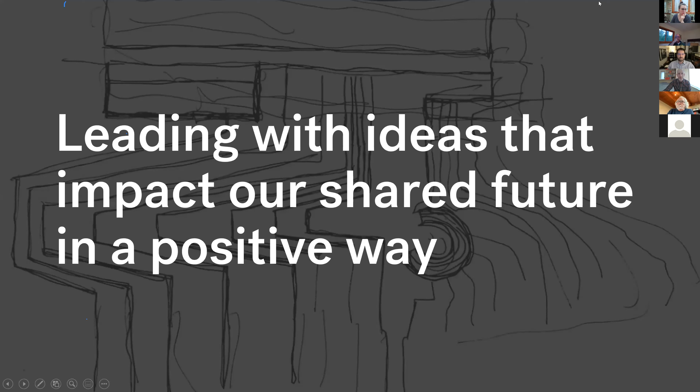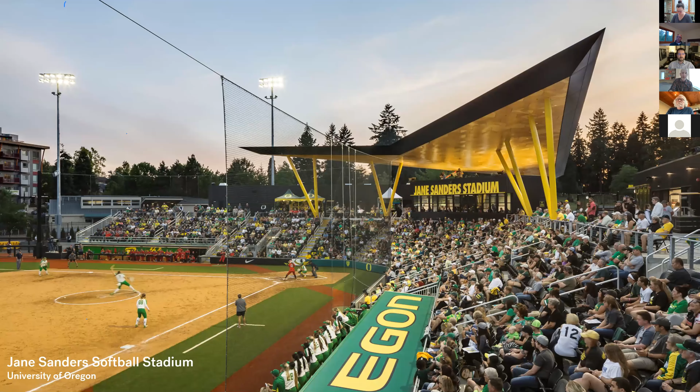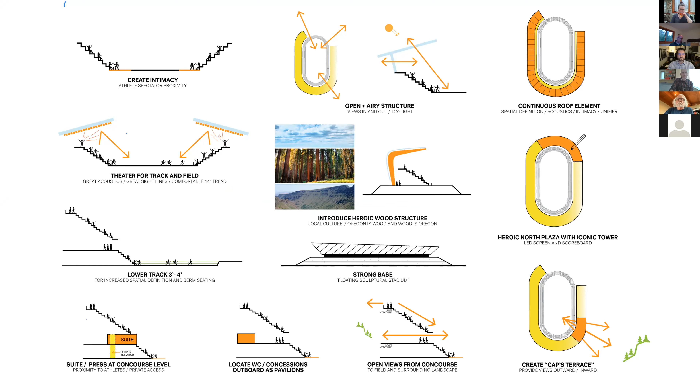So a little bit about SRG. Our ethos is sort of leading with ideas that impact our shared future in a positive way. If you look at our work, we have offices in both Portland and Seattle. They really are derived from a strong conceptual framework, and that concept can come from any number of places, as most good architecture does. It's informed by our communities, by our cities, by the people who live and work in these places. And we try and create those high concept designs for any and all projects that we do, regardless of the size, regardless of the budget, regardless of the client. And we also want to make sure that those big ideas are rooted in performance, and they're really rooted in this rigorous study, this rigorous examination, research around the performance and sustainability impacts of those decisions. And finally, we're just really excited to create wonderful places for people. We want to create environments that inspire, environments that really folks are happy to see as a part of the place that they call home, and really help create that positive impact on the communities in which we build.

Real quick intro on AEI, Affiliated Engineers, is a consulting engineering firm. We have about 700 staff across 17 offices in the US. Our main markets are healthcare, science and technology, and higher ed. So we typically work on more complex and high performance projects with a bunch of campus and institutional clients across the country.

Next slide. So as Ben mentioned, I lead the building performance practice for both the Seattle and Portland offices. And our group focuses on energy and carbon analysis, water modeling, the occupant experience, and resilience. And we really work at the planning, design, and operation stage of these types of high performance projects.

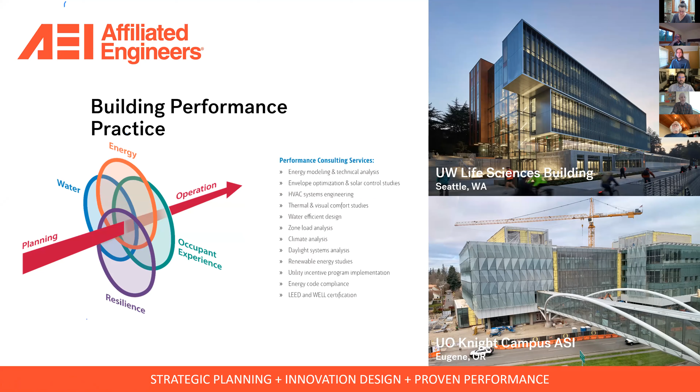All right, thanks, Lyle. And when we were first invited to be a part of the In-Process lecture series, we kind of thought about different ways that we might structure the talk, but really it came down to the best way to describe our process is to walk through a case study that shows that process step by step, and just sort of the level of consideration that goes into every decision we make as architects for a project. And so this one that we're going to talk about today is the OSU Cascades Academic Building 2 for Oregon State University in Bend.

The work you're going to see today was a result of a really, I think, incredible collaboration between a number of very exciting partners that we were able to work with on this project. We ourselves at SRG Partnership, in particular, I want to give a shout out to the project team: Carl Hansen, Lisa Pedersen, Lori Canup, Emily Wright, David Webb, Jenna Bird, and Jim Wilson. But we had some amazing partnerships in our consultant teams as well.

Just to give everyone a quick overview of what we're going to talk about today: we're going to start with the landscape—what does it mean to design for a high desert campus? The massing—how does the architecture respond to that place? The structure and enclosure—how are we looking at that through the lens of the decarbonization priority we have as architects and designers? Systems and operations—how are we going to get to net zero for this project? And finally, looking at the public spaces in the building and how we make sure those places stay simple and respond to the inherent beauty you see in mass timber structures.

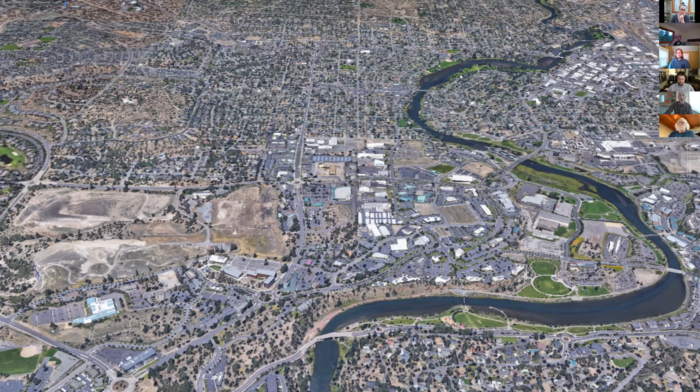Bend, Oregon, for folks who have been there, has downtown in the upper right here. This is the Deschutes River winding through the city. The area we're really going to talk about today is over here on the lower left, on the west side of town. This is a site that has been a sort of liability to Bend for a long time because it's an abandoned pumice mine and an abandoned landfill.

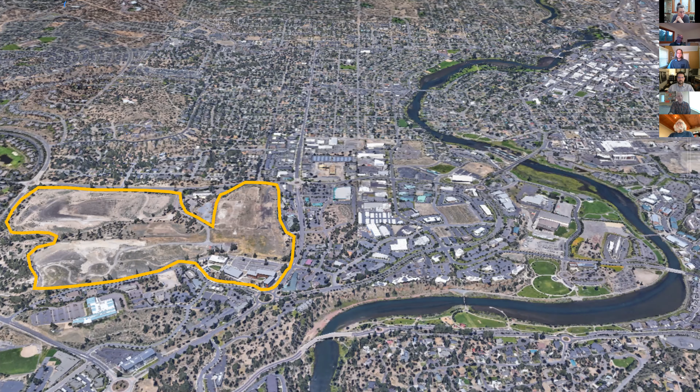The exciting opportunity with this, and I think the really incredible effort made by Oregon State, is that they purchased this land and envisioned it as a future campus in Central Oregon. They're really transforming it into a really ambitious new campus that has public-private partnerships and is targeting net zero energy and net zero water as it's built out over the course of the next 20 to 30 years.

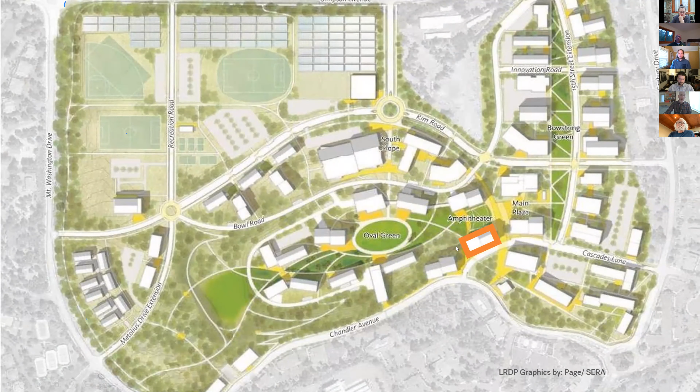The building we're going to be talking about is this one right here. It is the first of a whole new set of structures that will define the heart of this new campus, the oval green that will line this pumice mine carved into the earth in this part of town.

The project goals, when we were going into this project, were quite exciting but also a little bit intimidating. They wanted to set the tone for the future campus. They wanted to make sure this project was flexible and adaptable, a good prototype for future buildings, that it incorporated a meaningful use of mass timber, that it was net zero energy, and all of this on a fairly aggressive budget for a higher education project.

But before we talk about the building, we really want to talk about the place. If you think about Oregon State and its history, they had this beautiful campus in Corvallis with a very formal and traditional campus plan with these campus greens. That as a typology is really strong when you look at different types of campuses throughout the country and even the world.

But when you go to Central Oregon and look at the landscape of Bend and the high desert, it's a very different feel and a very different character. There's a rawness to it, there's a ruggedness, there's a sort of beauty that is different than what you'd find where a lot of us live down in the Willamette Valley.

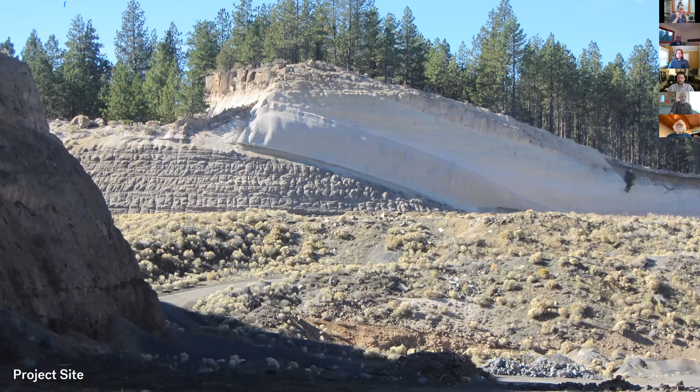And then finally, the site itself, which is really a man-made landform in a lot of ways. It's the remnants of this almost violent intervention into the earth, but in a way it has a sort of raw beauty as a result as well.

One of the more interesting and inspiring aspects of this pumice mine as it sits today is that you've been able to see over time nature kind of take back over that space. So how could we dovetail into that effort to restore and reclaim this space?

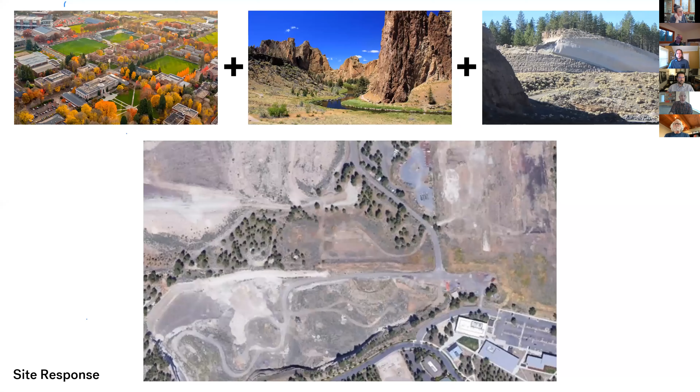Looking at those three forces in concert, we took the existing long-range development plan, where we had this oval green intended to be a sort of bucolic amphitheater, and really challenged that notion a little bit, saying: what if we start to take some of that high desert character, some of that ruggedness, and pull it into that space?

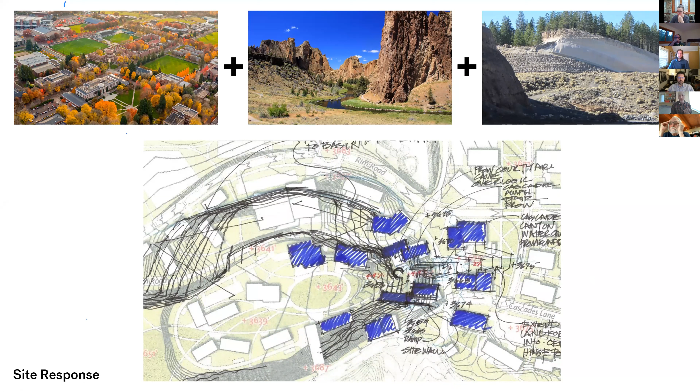This building becomes almost an inflection point between the natural landscape and this more formal campus that's being developed for the future. And that really was an inspiration to us.

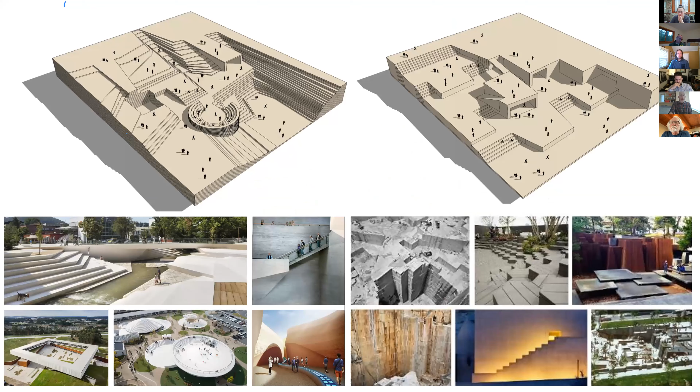Before we even got to the building, we really studied what that transition might look like, what that transition might feel like. On the upper left is really taking cues from the natural landscape, the natural erosion, the natural landforms.

And on the right is thinking about the actual act of excavation. What does the quarry look like? How does that terracing work? How can we evoke the memory of this place and not try to bury it, but really embrace it in a meaningful way, so folks can understand a little bit of the history of the place.

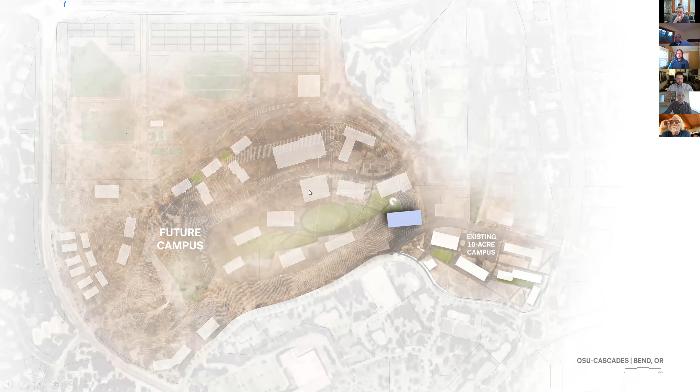That has become this campus for the 21st century. So that's what you're seeing here, the brown being the notion that this high desert landscape then sort of has this gradient down into this more formal campus green that's envisioned to be the heart of that future development.

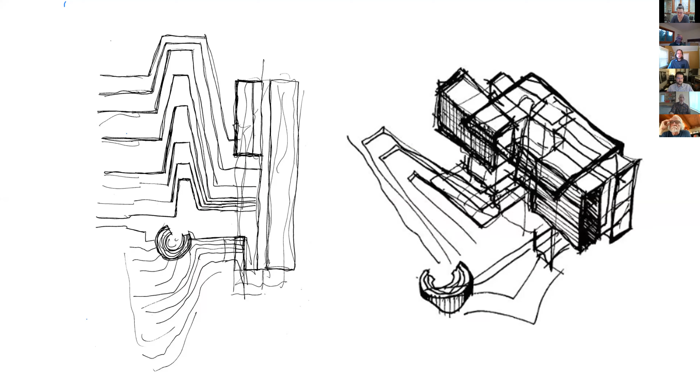From there, we really wanted to understand how that move can be a part of the building itself. How can we blur the edges between that indoor and outdoor environment? And how can the tectonics of the building really be in deference to the landscape, an authentic response to these larger moves, to this larger place, and also help check all the other boxes we're trying to achieve for the project.

So that's kind of what we're going to walk through right now, step by step. This is sort of how our process works, really thinking through all the different moves we make and making sure they're meaningful in some way.

And then you move it to the OSU Cascades campus, to that high desert landscape. Part of the architectural language already established in the buildings built for this campus is the use of wood. There's wood on all the exteriors of the different projects built there.

So we started with that as a base. Let's say we switch from that brick vernacular to the wood vernacular.

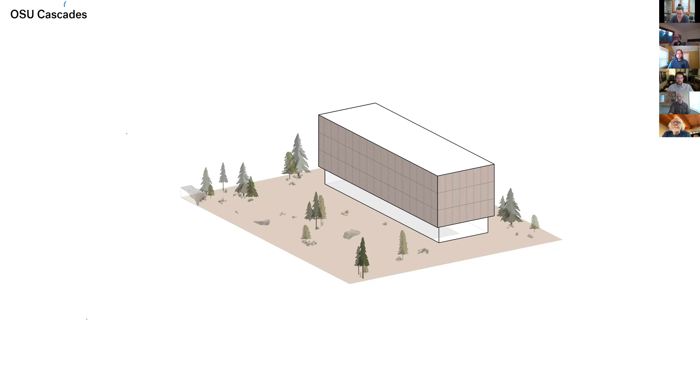And then we see that landscape drop off. We see it transition down to the bowl. And that kind of open, fluid, transparent ground plane that you saw on the flat site then cascades down with the site as it moves into the bowl.

And then the same thing happens with the program. The stack of the building begins to step down as well. So it's really happening because of the moves we're making, or that have already been made in that landscape.

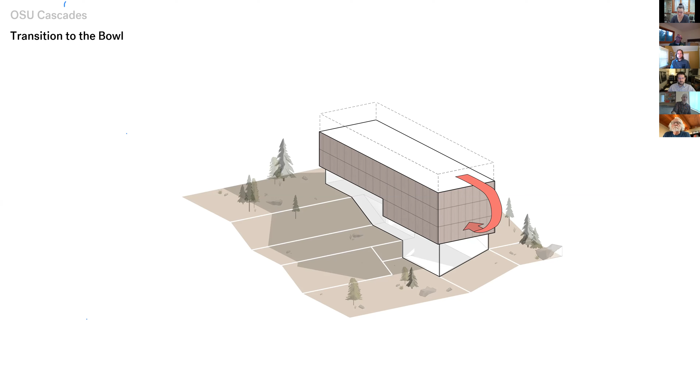The next big move is to divide the form, break it down the center. There are a few reasons for this. One is that it creates these framed views to the west, so you can capture that beautiful view of the mountains, of the Cascades, that really defines Bend and the high desert in a lot of ways—looking off to the west and seeing that mountain range.

And then from there, splitting it down the middle also creates two uniform bays on either side. We felt this was the best way to think about flexibility for the future, because if we could figure out an optimal bay depth that would work for a number of different program types, and then just modulate the length of those programs to find the sweet spot in terms of layout, you could have a lot of flexibility in how these buildings change or are organized internally, both initially and over time.

So you can imagine scenarios where the classrooms are grouped and the labs are grouped, or maybe, as you can see before, they're distributed evenly and mirrored about the center corridor, or maybe they just end up wherever they need to be for functionality or sustainability purposes. We really wanted to create an open framework around which the building could organize in a number of different ways, and change over time.

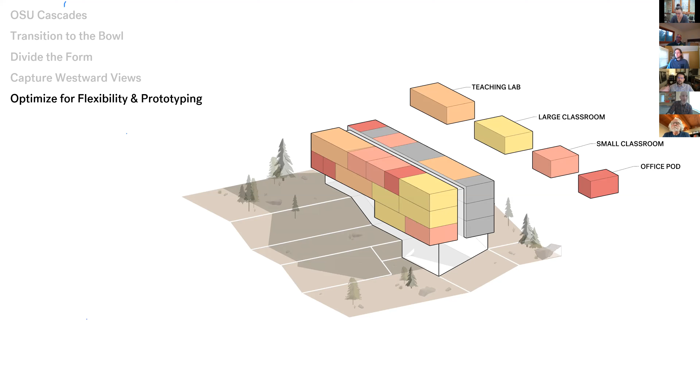It's also optimized for mass timber. For anyone who's done a mass timber project, you know the challenge of running utilities, mostly because of the deep beams you get on these larger spans. So if you can have a shorter span down the center that allows you to run all of those utilities and distribute them into the spaces, that's a huge advantage. We were really thinking through that lens when we divided it down the center.

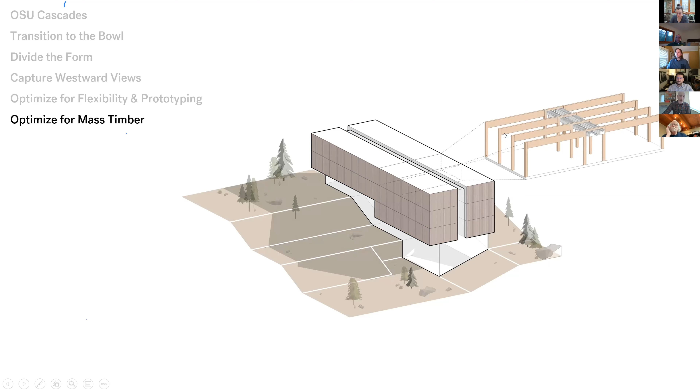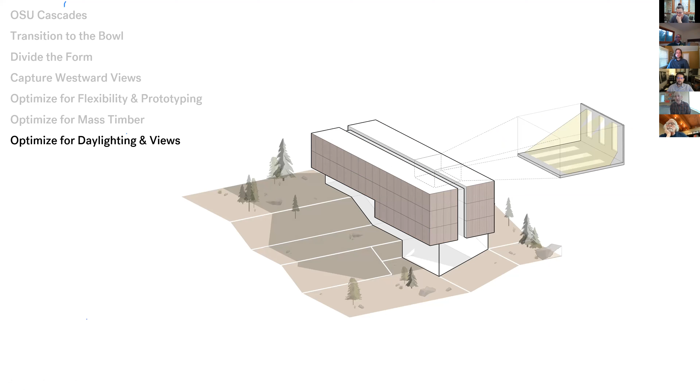We were also really curious, as you can see in this image, about how we could space the columns close enough to eliminate any perimeter beams on the building. That was due to some of the sustainability goals we had—we wanted to optimize those spaces for daylight and views. By limiting the depth of the bay and eliminating the perimeter beam, we were able to get these tall apertures all the way up to the underside of the structural deck for deep daylight penetration and high views out to the sky.

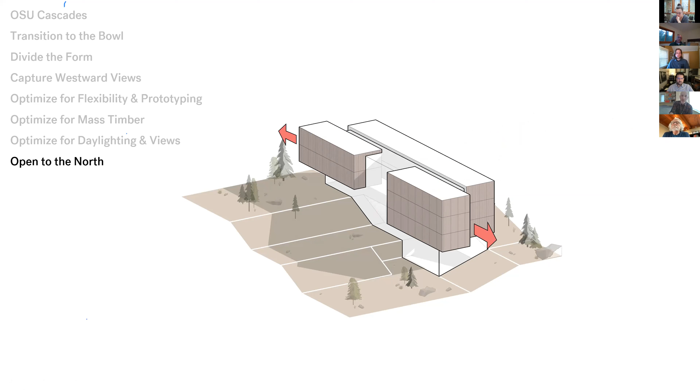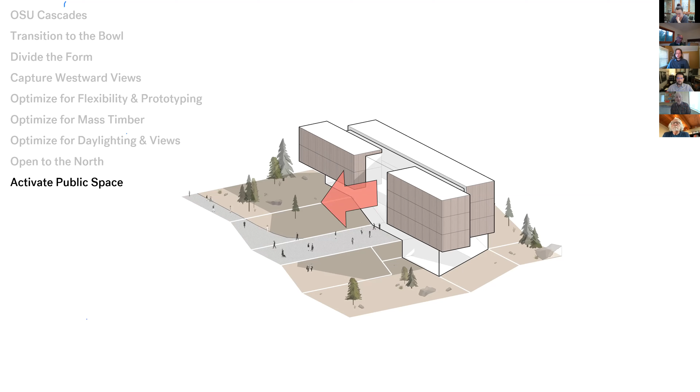The next move is on the north side. We broke it down the middle, and this has to do with the place we're building. It's a way for us to open up to that future plaza and future campus, especially at this critical moment where people are entering the new campus and descending into that campus bowl. It also allowed us to think about the south side as the workhorse side of the building, more of a service spine—a place to consolidate rigid functions like circulation, mechanical systems, bathrooms, cores, and also service access off of the road.

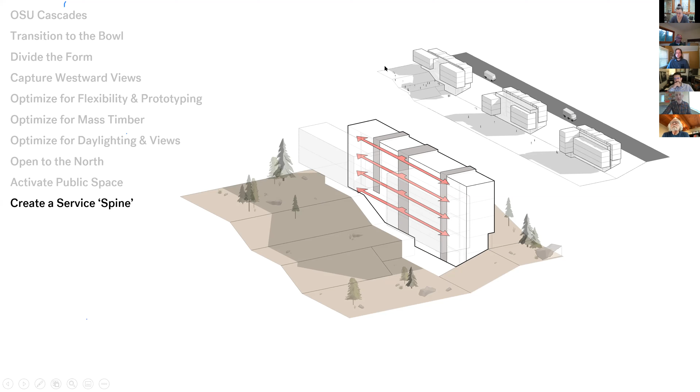So this back spine is really rigid in some ways, but it also means the campus side, on the bowl side, has a lot more flexibility in terms of how it develops for future projects. This envisions taking the AB2 prototype and marching it along the edge of that large property line, thinking about how the north side might change and modulate based on unique conditions as the campus grows and changes. Finally, we complete the form.

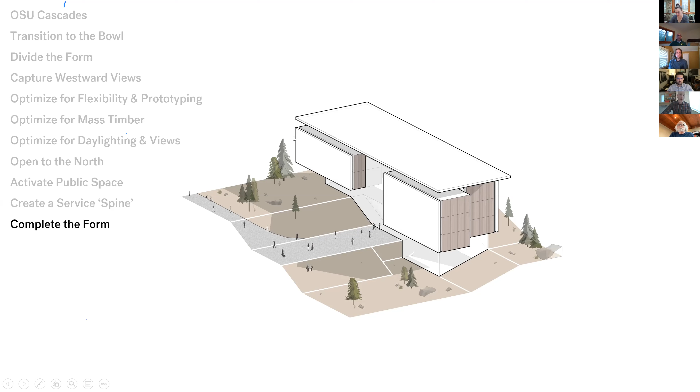We look at the roof form and articulate the north and south facades differently than the rest of the building. This allows us to limit the amount of wood we use for durability and long-term maintenance purposes, and it allows us to protect that wood.

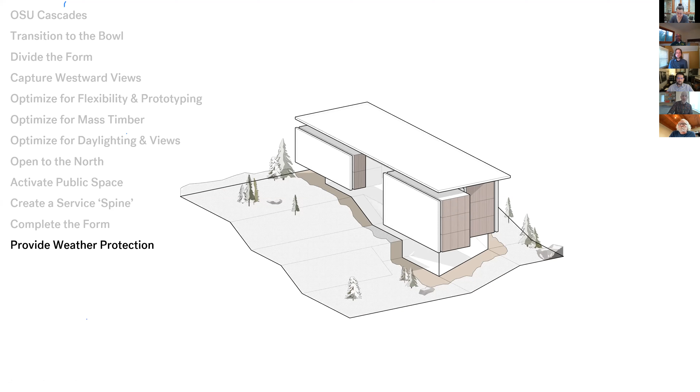It also allows us to think about other factors such as weather protection. As you can see here, the deep overhangs are really important in the winter for creating walkable paths that are protected from the snow. It also allowed us to maximize on-site energy generation to help us hit those net zero energy target numbers.

And finally, it allowed us to think about those north and south orientations, which are intended conceptually to be mirrored on the opposite side of the bowl when that side of the campus gets developed—tuning to orientation and controlling how we get peak cooling loads into those spaces, to really keep our options open in terms of mechanical strategies for the building, which ties to the embodied carbon story of this project.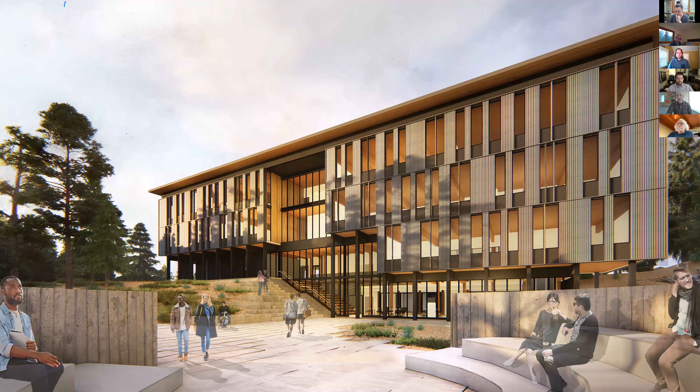But hopefully that's an insight into all of the different moves we've made, trying to run each of those decisions through a lens of what it's doing for the building, what it's doing for the site, and what it's doing for the owner and the user. So from there, we're going to jump into our discussion about some of the decarbonization strategies, now that we've seen how the building form came to be what it is.

The first one we're going to talk about is mass timber. I'm not going to run through all of the myriad benefits of mass timber or potential benefits, because I think anyone practicing architecture in the Pacific Northwest is very familiar with these.

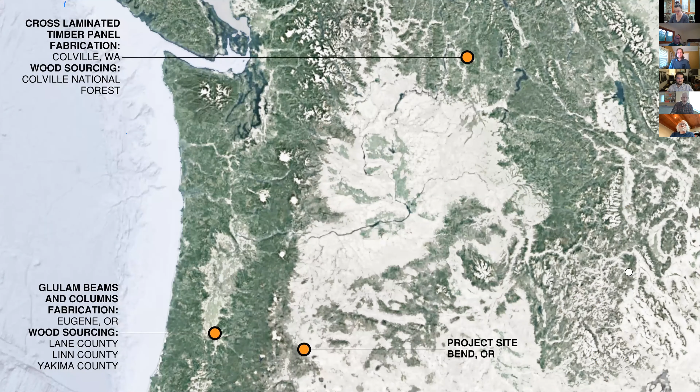But one of the things I will talk about is the sourcing of our wood. We're proud to say all of the structural wood for this project is being sourced out of the Pacific Northwest. Our glulam columns and beams are sourced out of Eugene, and our CLT panels are sourced out of Colville, Washington. We're particularly excited about the CLT panels because we're getting them from Vaagen Timbers, who is a member of the Northeast Washington Forest Coalition.

Their mission is really to improve the ecological function and fire resilience of our national forests. It's a unique partnership between a number of sustainable and conservation nonprofits, as well as industry leaders. This highlights the fact that just using wood isn't really enough. We need to make sure that through the carbon lens we're making an impact, getting that wood from the right places through sustainably managed forests. Folks are really thinking about not just using wood, but making sure it's coming from the right place.

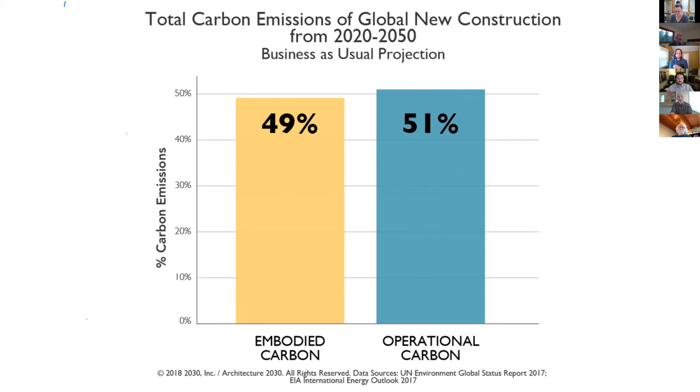So that's something we're going to start talking about a little more now, because we feel like we've really zeroed in on operational carbon over the last decade or two, but embodied carbon is a new frontier, and frankly we're still trying to get better at it. But here's a few things that we did.

It's not just about what materials you choose to use for sustainability reasons, but also how much material you use. If you can minimize the use of material, that's also an interesting strategy to reduce embodied carbon on your projects. Related to mass timber, what you're seeing here is a study.

This is a 40-foot long panel, a typical size for a CLT panel, looking at two different column spacings. Seems like a pretty simple exercise, but as I said before, we're trying to eliminate this perimeter beam and really utilize the ability of the CLT to span on its own. By creating a 10-foot column spacing as opposed to a 13-4 foot column spacing, that allows us to go from a 5-ply panel down to a 3-ply panel, which doesn't seem like much. Intuitively you might look at this and say, well, there's more columns and beams, so there's more material.

But because there's so much more floor area, that actually reduced the overall structural material in the project by 30%. We're estimating - we haven't done the hard numbers on it yet, but I've been working with my colleagues over at Katina to really crunch those numbers. So small moves like that can make a big difference in terms of the weight of our buildings: less concrete, less foundations, and less wood fiber.

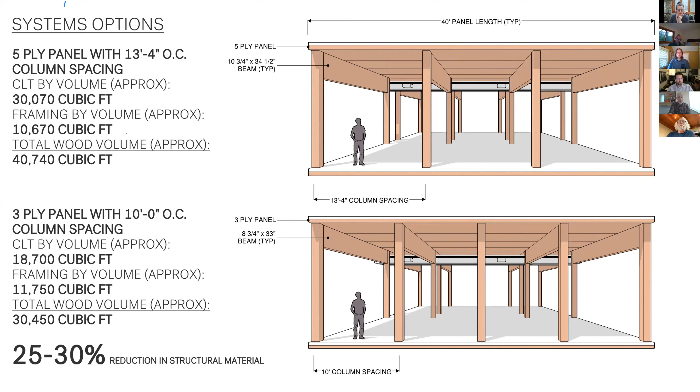We're also trying to get smarter about concrete. We're looking at collaborating with our structural engineers and concrete suppliers to really lengthen the cure times on our concrete slabs, our concrete walls, our foundation walls, and our cores, because it's going to allow us to reduce the global warming potential there. Admittedly, we did not get out far enough ahead of this on this project, because this is actually fairly new information to us, at least. But this is something we should all be trying to do on the projects we have moving forward.

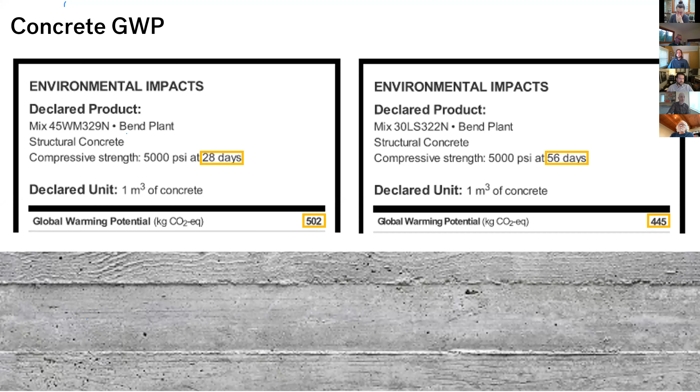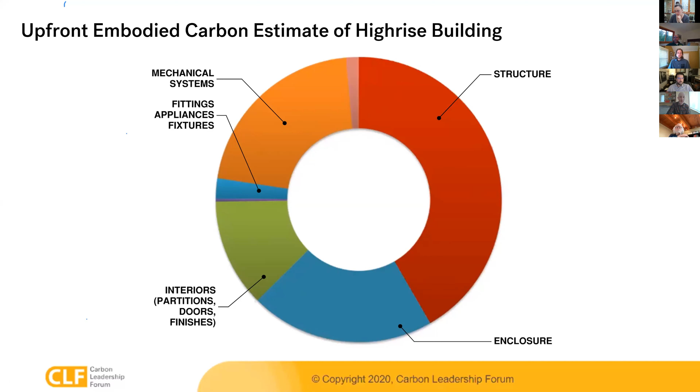Up to this point, we've primarily focused the conversation around structure because it's the biggest piece of the pie. But from here, we're going to pivot to mechanical systems and enclosure, because those are the next largest. This is for a high-rise building, but it really translates to most scales in terms of the scale of impact of that embodied energy.

In terms of mechanical systems, we're going to talk about refrigerants, because for most folks working on budget challenge projects, VRF (variable refrigerant flow) comes up a lot. That's because it's the cheapest system that helps achieve our operational energy goals. But when you look at VRF through the lens of embodied energy, it's problematic. If you look at this graph, the refrigerant in our systems can create up to a third of the embodied energy or global warming potential of our mechanical systems, and that impact just grows over time.

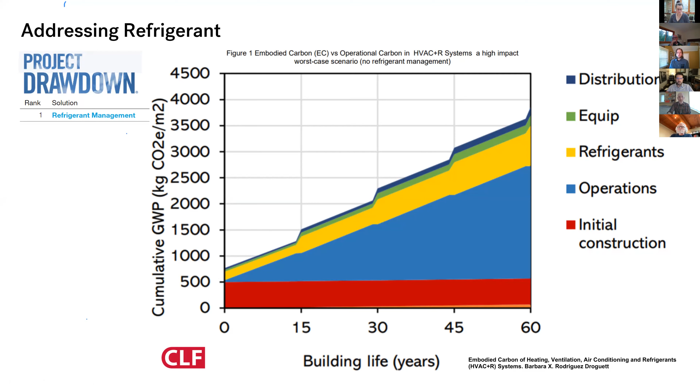The challenge with mass timber is we have this impulse to expose the wood. That's a great impulse for the interior of the space. But if that means you also want folks from the outside to look in and see it, it leads to an impulse to overglaze our buildings. So we really wanted to make sure we were thinking about the envelope through the lens of keeping as many options on the table in terms of mechanical strategies, to move away from refrigerants and find other viable mechanical solutions based in hydronic systems as opposed to refrigerants.

This brings us back to the facade and the expression of the facade, and the decision we made to create the north and south sides in a different way and articulate them differently.

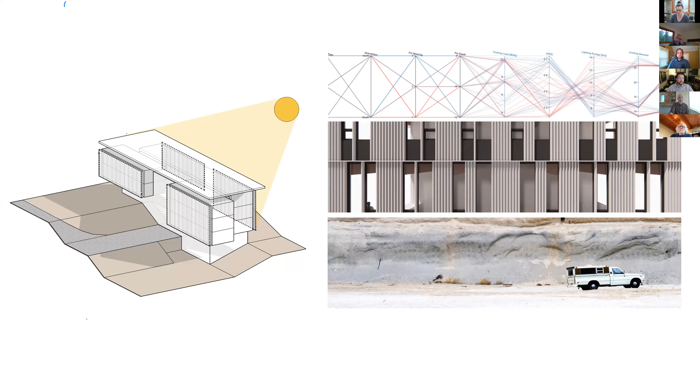In terms of inspiration for the patterning and materiality, we really looked at the mine itself. There are these incredible deposits of pumice with vivid, beautiful striation and wonderful tones of color. We're trying to see how we can mimic some of that light and shadow, and those tones, in the way we compose a facade.

We were also trying to keep it economical and simple. We looked around for the right material and found this modest metal siding with a corrugated form. We liked it because of the depth of that corrugation—you get a 4.5-inch depth, creating really deep shadow across these surfaces.

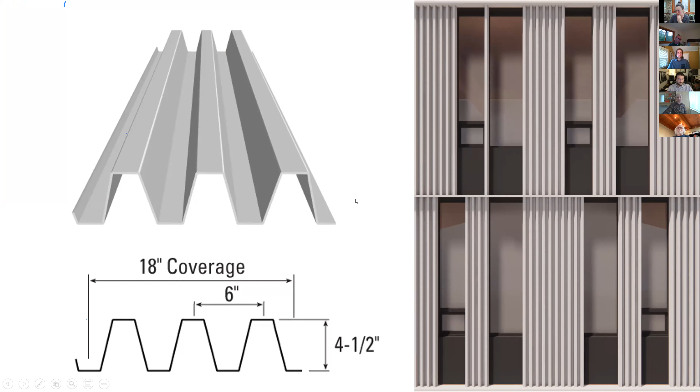In addition, you also get shading from it, and that's what we were trying to push—is there a way to think about the facade not just as an architectural expression, but as an energy strategy that isn't applied onto your building, but baked into the wall assembly.

So what you're seeing here is the 4.5-inch deep profile, and we took the rain screen clip and pushed it out further than it needed to be. It creates more of an air cavity, which is kind of free space in a lot of ways, other than the returns of the sheet metal.

That move alone created a full foot of shading in the vertical direction on these vertically oriented apertures back to the glazing surface. By breaking up the elevation horizontally, we got an additional 16 inches of depth in the horizontal shading. We were also able to break up the material to a scale and size compatible with the product we were looking at.

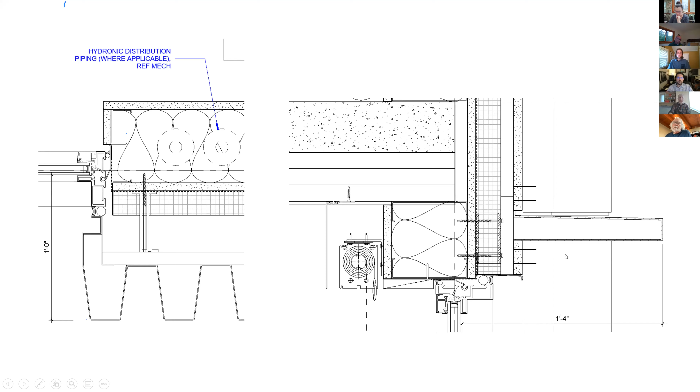This is looking just at that one bay, a 30-foot bay with three 10-foot column spaces. From here is where we really started to plug Lyle into the process, and did real explorations of the relationship between how we develop this facade and how we can help mitigate the embodied carbon impact of our mechanical system to really hit those net zero targets.

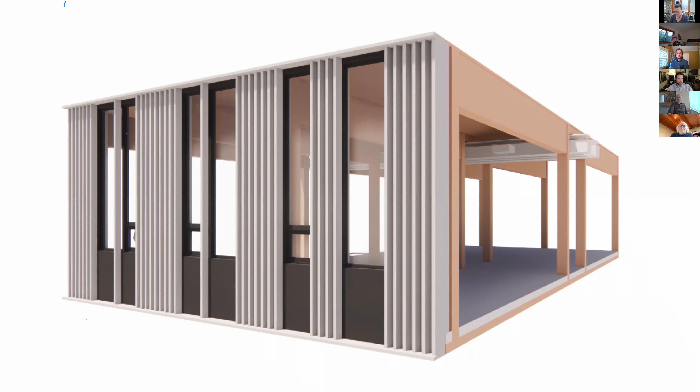Sure. So really early on in concepts and at the start of schematic design, we were prototyping these facades and trying to determine what major moves we would need to take to really set us up for success on the project. We analyzed the facade performance within these key performance indicators you're seeing on the screen, wanting to consider all of these metrics to balance and optimize them to maximize the objectives as best as we could. Those KPIs were aesthetic vision, trying to preserve the views to the outdoors, as well as expose that beautiful timber ceiling from the outside.

Obviously, annual energy consumption was a key objective, trying to get to the net zero energy target. Coupled with that was looking at the peak cooling loads and how that impacted the HVAC system selection. We had a real careful eye on trying to minimize the cooling loads through the facade so that we could unlock more efficient HVAC technologies—trying to utilize either radiant heating and cooling systems or hydronic-based sensible fan power boxes, unlocking that potential again by minimizing the cooling loads to use those high-efficiency HVAC systems. Daylighting and cost, additionally, were metrics that we considered.

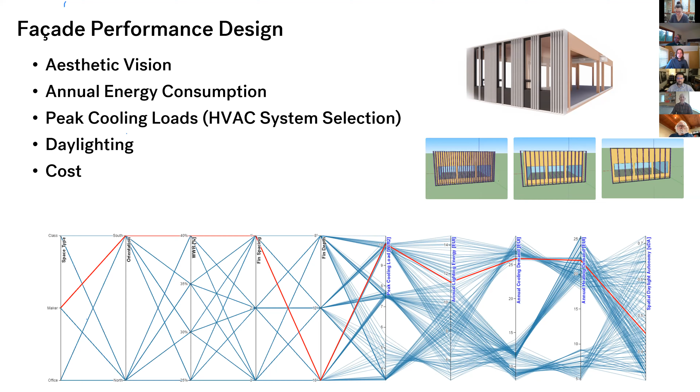What you're seeing at the bottom is an example of a tool I'm going to bring up and demo real quick. Share my screen. Wrong screen. There we are. Oop, lost it. All right.

So analysis really impacts design through the use of effective communication and visualization tools that allow stakeholders to understand the relationships and really make decisions with confidence.

So what you're seeing on the screen here is a target selection tool, and it's some of this parametric analysis we did early in design to understand the impact of these facade concepts on different outputs. On the left-hand side, you can see we looked at space type, orientation, window to wall ratio, as well as fin spacing and depth. We did a bunch of parametric runs to understand how that impacted the peak cooling loads, lighting, heating, and cooling energy, as well as spatial daylight autonomy.

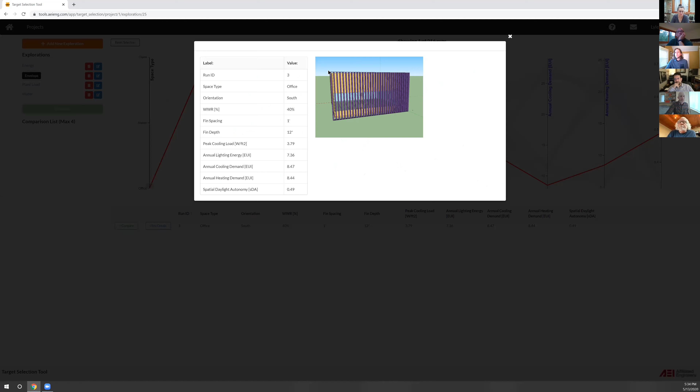So just to give an example of how this works, let's say we looked at an office space on the south facade. We had 40% window to wall ratio, 1 foot spaced fins at 12 inches of depth. You can take a peek at that run, see that you have a peak cooling load of 3.79 watts per square foot, and understand some of the metrics there. Maybe you want to look at the impact of multiple fin spacing—so looking at 1, 2, and 3 foot spaced fins, you can see the range of peak cooling load between 3.7 and 5.3, and also understand the impacts of lighting, spatial daylight, and all the other metrics.

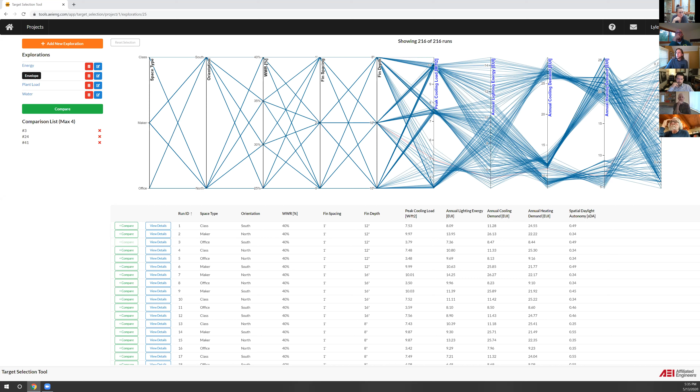What's really compelling about this is you can kind of work it right to left and optimize for different outcomes and see what design metrics and design moves are on that critical path. So just as an example, let's say we want to target good spatial daylighting autonomy, maybe 55% or above. We'll look at the office on the south again. Even just looking at better spatial daylight, you can see a 1 foot fin spacing does not agree with that type of result—so that shows you that's off the table.

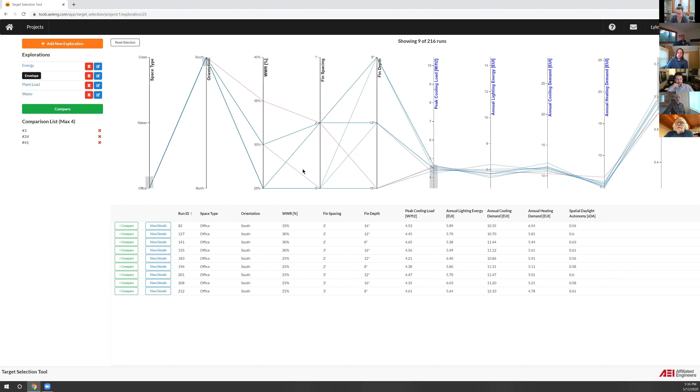We also talked about minimizing those peak cooling loads as well, trying to bring those numbers down as much as possible to unlock those more efficient HVAC strategies we were looking at. So trying to maximize spatial daylighting and minimize the peak cooling load led us to this combination of design solutions. Let's say we picked the 35% window to wall ratio to maximize the aesthetic vision—that shows us that approximately 2 foot spaced fins and about a 16-inch fin depth was appropriate for that.

So this is again a visualization and decision-making tool that allowed the integrated project team to understand the relationships of many metrics at once. And you can really design at the speed of conversation and build the bundle up in real time, playing those what-if scenarios to really drive the design and maximize the outcome.

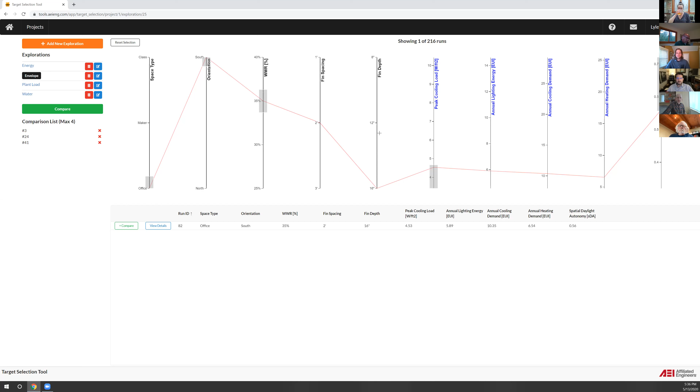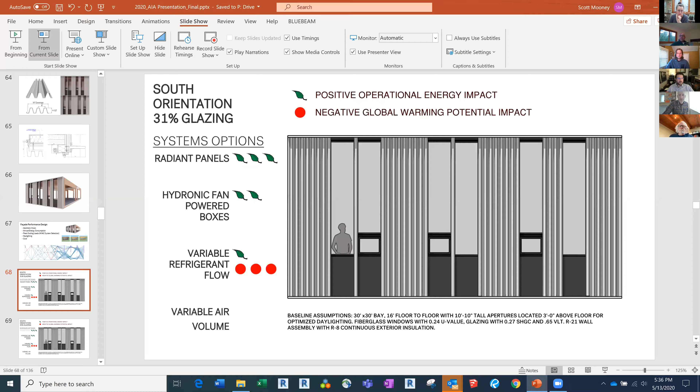We took that single bay and wanted to understand, thinking in these 10-foot bay increments or column spacing, what it looks like as we increase the amount of glazing by 6-inch increments, which is the module of the corrugated panel we chose as the facade expression. At 31%, all the options are on the table.

You have the best energy performance systems on the market, as well as VRF and VAV. Green indicates operational energy potential in a good direction, and red indicates global warming potential in a negative direction. From 31%, everything's there.

At 35%, that's taking 6 inches out of each 10-foot portion of the facade. We've already lost radiant panels as an option. If you take it one step further, another 6 inches, we've suddenly painted ourselves into a corner in terms of our system selections.

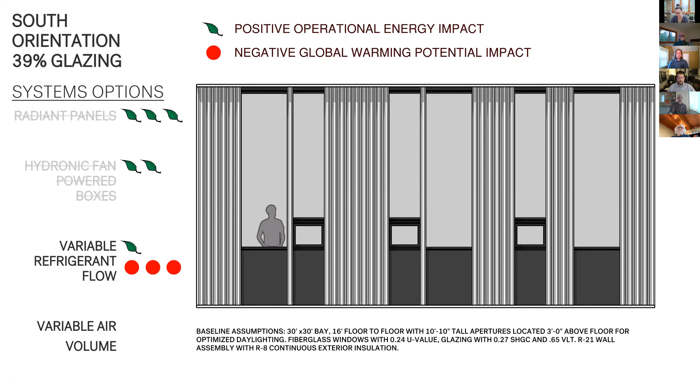These sensitivity studies really helped guide decision making around the facade, making sure we were doing the right thing from both an energy and a carbon perspective. We landed on that 35% glazing expression for the building, and that's what you're seeing here.

One thing to note is these larger expanses of glass are north facing, so we don't have the same peak cooling load issues. On the opposite side, we actually have a solid to offset this void—that's our building core.

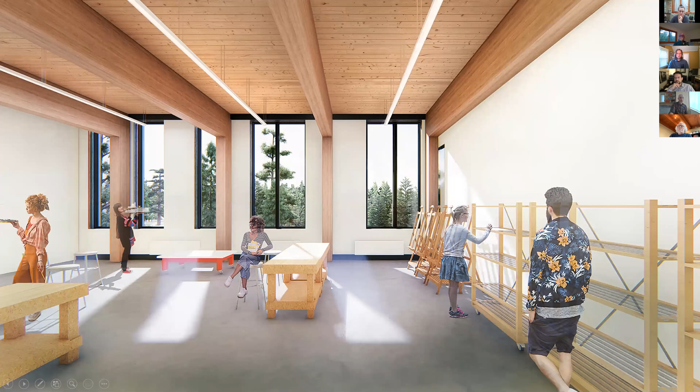As you move to the inside of this space, this is where we start to get excited about some synergies—we're getting deep daylight and wonderful views to the sky, but we're also seeing a mechanical system in this image, hard to spot, where all the heating and cooling is managed in this perimeter zone at the base of the wall. We couldn't really afford a raised floor on this project, and it didn't work from a program perspective either, because higher education projects have very particular vibration criteria that aren't compatible with raised floor systems.

But we still found a way to get a hydronic system in place, have it be at a competitive price point relative to VRF, and also keep it off the ceiling plane so we could expose that beautiful CLT structure. From here, I'll pass it back to Lyle, who'll talk about what this system is—these hydronic fan-powered boxes—and how all these moves get us further down the road toward our net zero energy target goals.

We really wanted to select an HVAC system optimized for our net zero energy target, for the aesthetic vision of the project, as well as first cost. We ended up with a real balance of those and went with what's called a sensible fan power box.

This is a hot water and chilled water heating and cooling type unit. There are small fans in there that are highly efficient—think about the size of a computer fan stacked up into an array. These provide all the heating and cooling needs for the zone.

We had a dedicated outdoor air system supplying tempered primary air to the space, but really these units, by keeping the cooling loads low enough that we could fit them in only along the perimeter wall, provide an energy efficient system that's a step above the traditional VRF or VAV type system.

It's also really cost competitive compared to a radiant heated and cooled ceiling or a full chill beam solution, with almost the same amount of energy performance as those types of systems. So we found a good balance of cost and energy efficiency there.

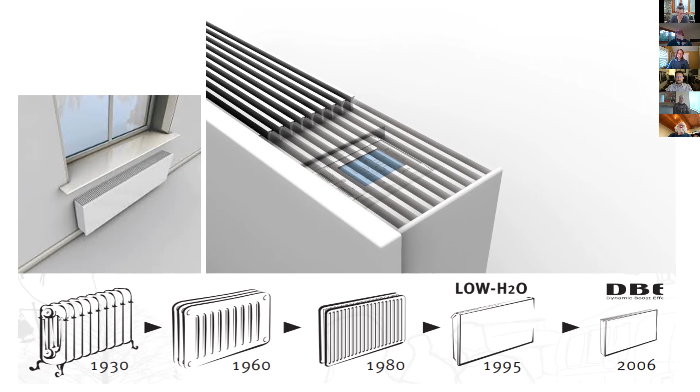So again, you can see on the interior rendering here, we really wanted to keep the ceilings open and really have that beautiful mass timber ceiling exposed.

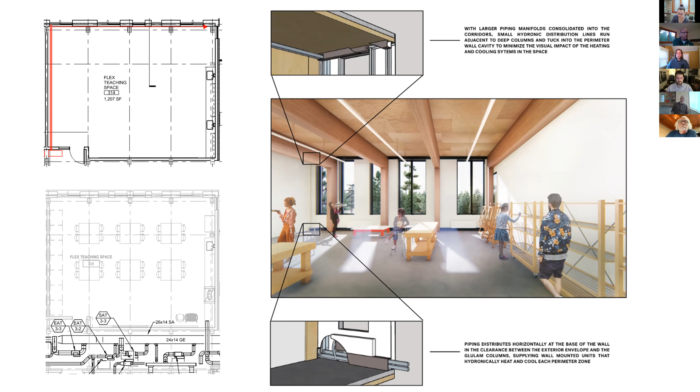This sensible fan power box coupled with a dedicated outdoor system was really a great way to balance the aesthetic vision, keep it cost competitive, as well as maximize the energy efficiency on that path to net zero energy. You can kind of see another beautiful rendering of it here as well.

And just again, keeping those cooling loads low enough so that we could have these smaller units located along the wall here and not have to put any units interior to provide additional capacity was part of that initial facade and load study.

So those were some of the early concepts that informed the prototyping of the massing as well as the facade. And not only did OSU want the building form to be a prototype for the future, but they wanted the energy design, the systems design, and the path to net zero to be a prototype for future buildings on campus as well, to achieve a high level of energy efficiency and a high level of building performance. I'm going to talk a little bit more about the net zero energy design process that we went through.

So getting to zero on this project, Scott and I haven't really talked too much about the program, but this isn't your typical classroom and office type of university building. There's actually a mix of labs and really interesting program here: a biomechanics and kinesiology lab, a cadaver lab that requires 20 air changes, a maker space and a machine shop, spaces that both have intense equipment requirements as well as specialty exhaust systems. So the research and teaching lab component of this have pretty high EUIs, energy use intensities, to begin with.

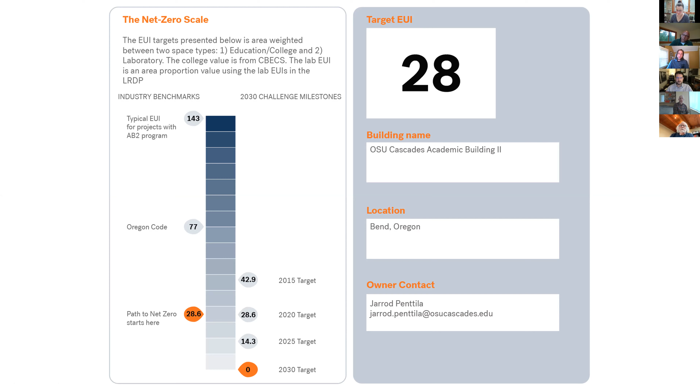What's interesting is getting to this EUI could actually include the impact of renewables if we wanted to, but serendipitously enough, we found out that the amount of renewable energy that could be produced on the roof area of this building fell sort of in the 26 to 29 EUI range. So trying to really hit OSU Cascade's goal of creating net zero energy for this project, we're trying to have the building consume about 28 EUI on its own.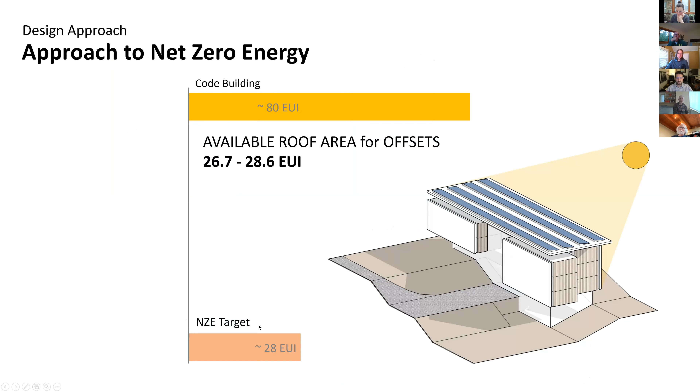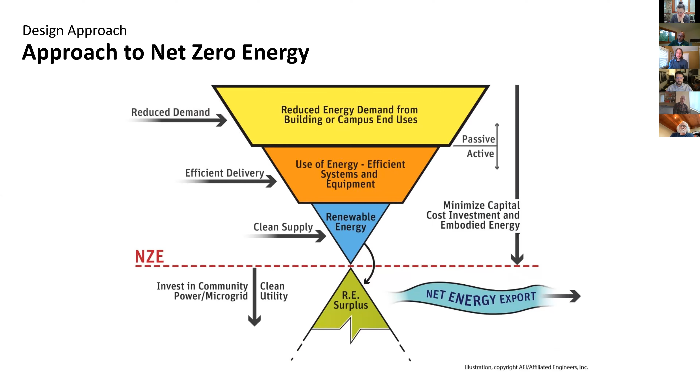So again, in the spirit of the in-process lecture, we're trying to talk a little bit about the approach to net zero energy design here. We really start at the top, and it starts by reducing the demand for heating and cooling energy and reducing the demand for lighting, and applying passive systems as much as possible to reduce that demand for energy. From there, you look at applying the most efficient active mechanical systems that you can, and really try to minimize the cost and space required for renewable energy to offset that building EUI to hit the net zero energy target.

So a code-compliant building would be around 80 EUI. Applying some of those demand reduction and passive strategies we talked about earlier got us down to about a 65 EUI range, with careful attention to glazing and shading.

We also went with fiberglass windows on a majority of this project. Going with the fiberglass frame windows allowed us to get almost triple pane levels of glass, but still a very lightweight and very thermally efficient type of construction.

We have all LED lighting design with full daylighting controls. Equipment power was another area we really attacked, looking at controlled receptacles, particularly in the machine shop and maker space, to help keep those internal process loads down.

So the next step in that net zero energy design was applying the most efficient active systems we could. We talked earlier about the zone level heating and cooling systems and the dedicated outdoor air system for ventilation, but I want to briefly touch on the plant system.

One thing to note is that if we had applied these types of solutions to a more typical open office or standard classroom building, we probably would have been down in the range of 25 EUI and able to hit that net zero energy target. But with this program, we were closer to 37 EUI, and we really needed to push hard to get to that more aggressive level of performance for this mixed lab and classroom building.

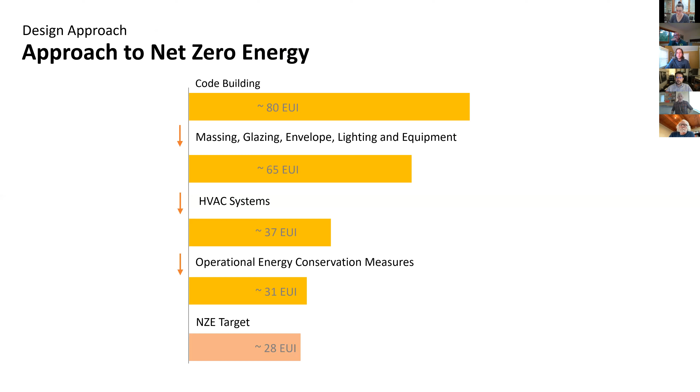Another thing we wanted to talk about is operational energy conservation and the opportunities that provided. We sort of got to about a 37 EUI at the end of SD, and we really wanted to engage the owner and be transparent about our assumptions.

They really carefully worked with us and gave us feedback about the use of the building. They wanted more weekend events in the flex lobbies and more occupied hours in the cadaver lab, and that actually bumped our EUI up a little bit. But it was really important to be transparent and get them on board.

We also looked at the impact of operations as an opportunity for them to reduce energy much further as a low cost type of strategy. We looked at really enhanced temperature and ventilation setbacks, and through this list of operational ECMs, we were able to get the EUI down to 31.

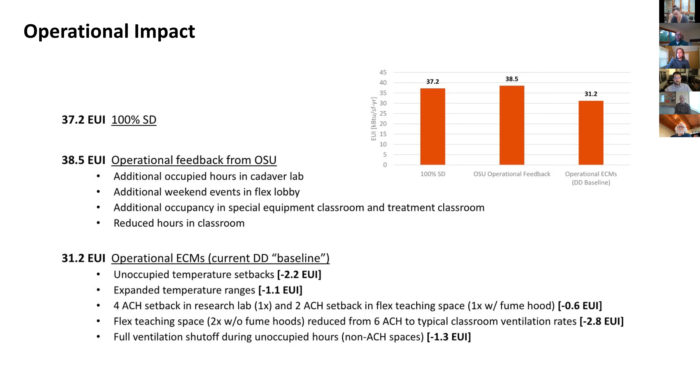I think it's really key that we were open and transparent with the owner about this. They understand this is the part of getting to net zero that's on them, and they have to be diligent and aggressive about operating the building to get there. But presenting these as opportunities and working with them allowed us to find more energy savings on this project.

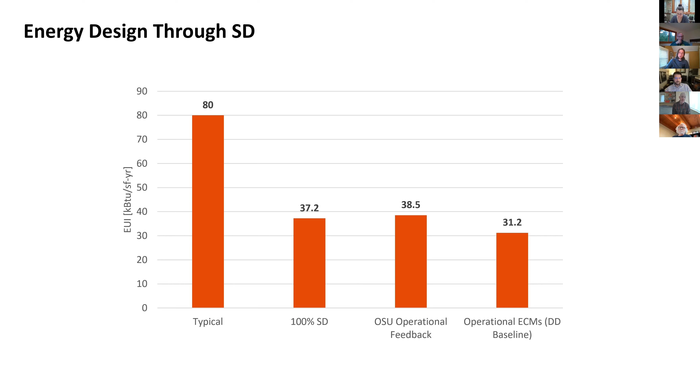So we were at about 31 EUI and just starting the DD design phase. This is the part of the project where we've got all our silver bullets and big strategies, but really trying to push that extra 3 or 4 or 5 EUI starts to hit diminishing returns, and more importantly, starts to become a lot more costly.

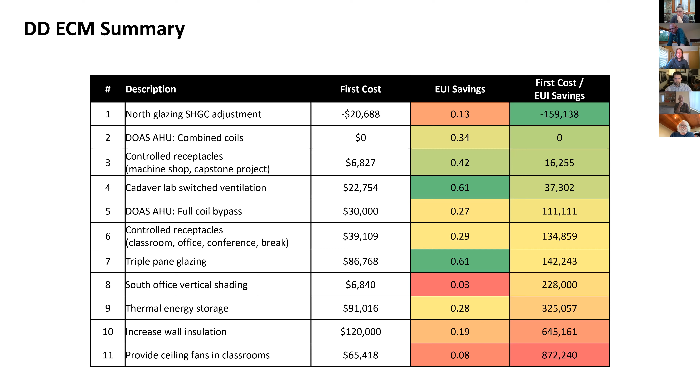So we did some parametric energy and cost analysis throughout DDs. I don't want to focus too much on the specific concepts, but we looked at first cost to EUI savings, which is the best bang for the buck of the strategies we considered. Applying these in sequence helped determine the most first-cost-efficient path to our goals. We also looked at the overall magnitude of those EUI savings to see if it would really move the needle a lot or just a little, which helped us focus in on some of the strategies as well.

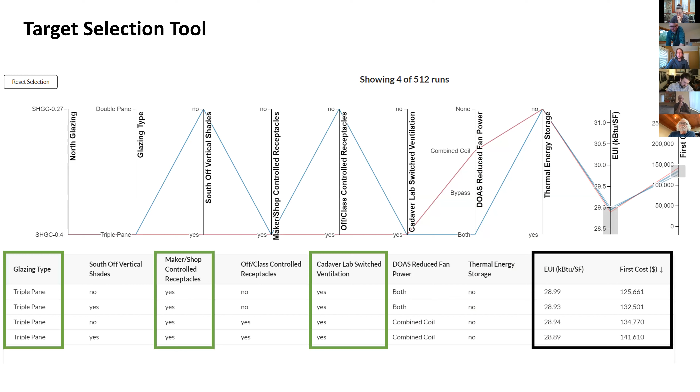Here again, we used the target selection tool to optimize and bundle strategies, which looked at the interactive effects of all those options and provided a much more accurate representation of the cost and energy impacts of bundling different groups of strategies, helping us identify the critical path. This was our recommended bundle, and we were able to get down to that 28 EUI range for only about $120,000 of additional cost at DD.

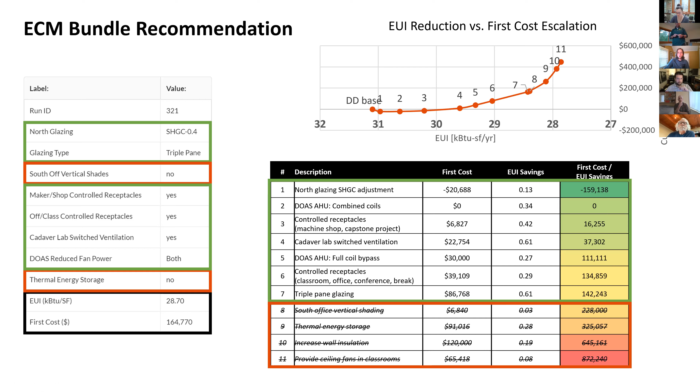As you start to apply these strategies, the additional cost to squeeze out little incremental EUI savings becomes really costly. So this was a strategic approach we had to work through with the owner to get those last few EUI savings and achieve our targets.

So the DD ECM bundle put us really within range of the net zero energy target production, and from there we set the project up for success. We had all these concepts baked into the cost model, and we've really just been writing things out from there on out on the energy performance goals.

So I'm going to hand it back to Scott now. He's going to talk a little bit about the interiors and the expression there. Awesome, thanks a lot, Lyle.

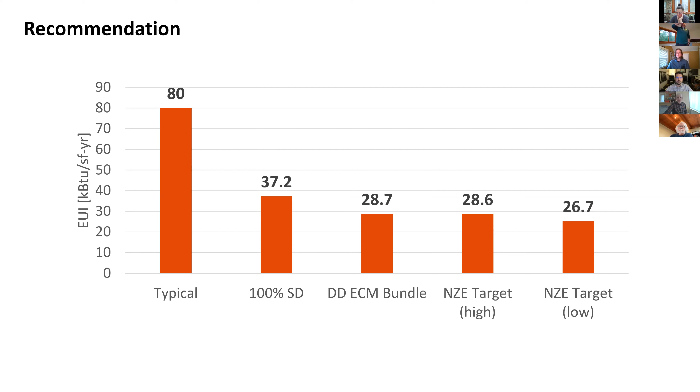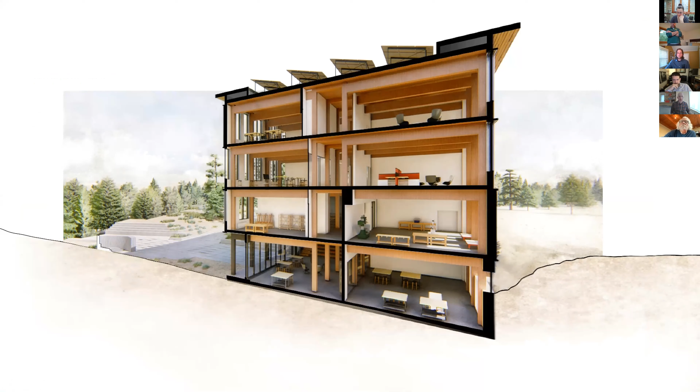From here, we're going to jump back to the interiors and circle back to the building as a whole. As you can see, we went through an arduous process to keep this building simple, to have all the big moves almost hidden to a certain extent. So when you look at the building, you just see the beauty of the architecture and the structural system. From there, how can we have an approach to our interior public spaces that takes that same approach? How simple can we have it and still have it work and be beautiful?

In terms of the interior palette, the one material besides wood and concrete we're introducing is these beautiful black steel connections that allow the glulam columns and beams to come together at these seats, which are exposed to the underside. We took that as a cue to develop a series of signage, screens, and guardrails that pick up on that language.

This is the work of our interiors lead on this project, Emily Wright, who totally nailed this whole thing. What you're seeing now is our signage solution in terms of wayfinding down the corridors.

One of the challenges in these mass timber structures with tight column spacing is that it can get a little disorienting, because you're just seeing this sea of columns as you look down the corridors and can't really see the walls between them. So we looked at a really simple column wrap made out of that stained steel language, with a subtle profile that matches the view that inspired that initial break down the center of the building.

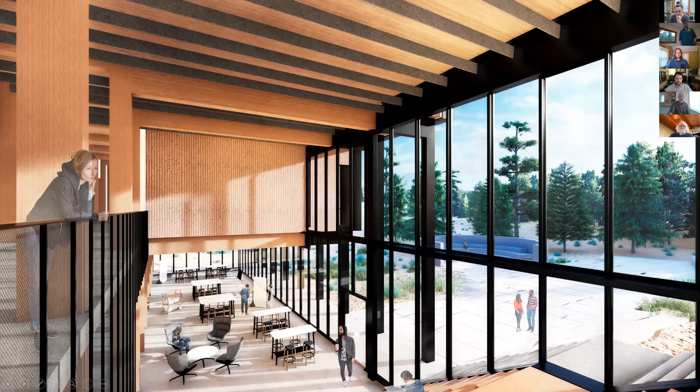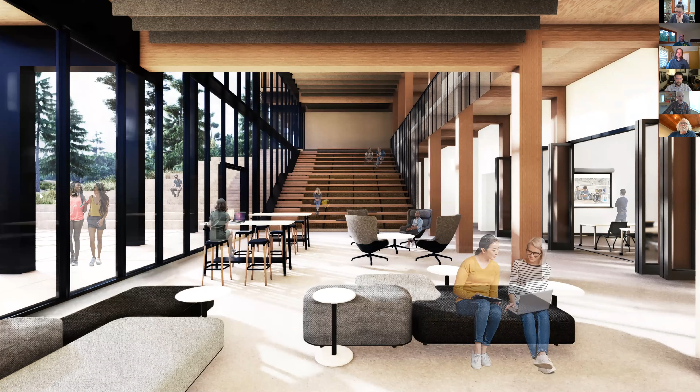Then as you move to the large space that leads out into the landscape, we looked at a simple language of a steel guardrail with metal mesh, introducing that same language into the large cascading grand stair that again creates a strong connection to the carved landscape we're using to transition down to the bowl. Hopefully that's a good synopsis of our attitude and process about design.

We really want to create beautiful, coherent buildings, but also buildings informed by rigorous research and performance-based analysis, in addition to all the other functional and aesthetic considerations we have on other projects. But at the end of the day, we just want folks to feel like this building is making a positive impact on their community and contributing to their everyday experience when they go to school at OSU Cascades.

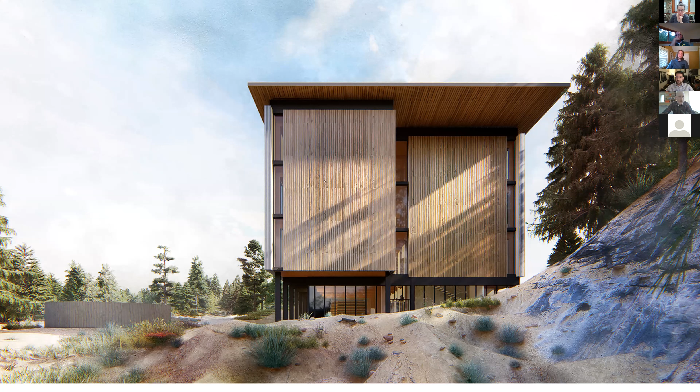So some quick ones. What's the LEED certification target for this building? Lyle, do you want to answer that? So the project is not pursuing LEED certification, but we are achieving a minimum LEED Silver or equivalent to the OSU Cascades requirement. So we're kind of keeping a scorecard alongside, and OSUC's requirement is LEED Silver equivalent, but we're not actually applying for certification here. They are really focused on the campus goals of net zero energy and net zero water. Great.

We've got another question for Lyle. Could you explain a little bit more about the parametric process that generated the iterative line diagram?